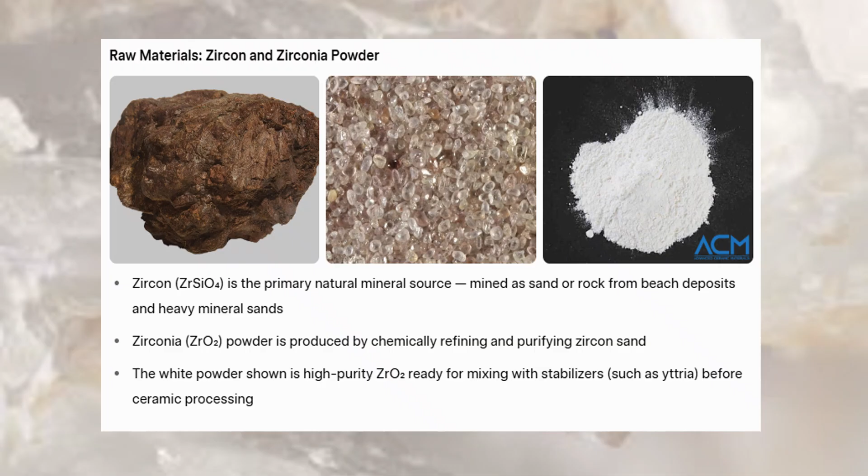Then on the right side is the pure white zirconia powder. This powder is created by chemically refining and purifying the zircon sand. The result is high purity ZrO2 powder that we can then mix with a stabilizer like yttria. This white powder is the starting material for all the advanced zirconia ceramics we'll talk about today. Everything begins with mining zircon and turning it into this fine powder through chemical processing.

Pure ZrO2 has three crystal forms: monoclinic, which is stable at room temperature; tetragonal, which is stable above approximately 1170 degrees Celsius; and cubic, which is stable above approximately 2370 degrees Celsius. Pure zirconia wants to change phases when it cools, and that volume jump would shatter it. Adding yttria stabilizes the useful high temperature forms so we can use it at room temperature.

Cooling causes a tetragonal to monoclinic change with 3 to 5% volume expansion, which cracks the ceramic. The solution is adding 3 to 8% yttria to create yttria stabilized zirconia, YSZ, that stays tetragonal or cubic at room temperature.

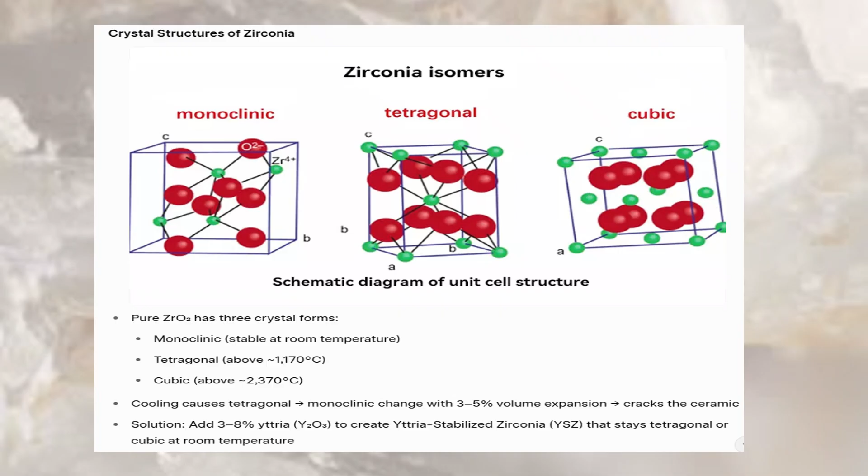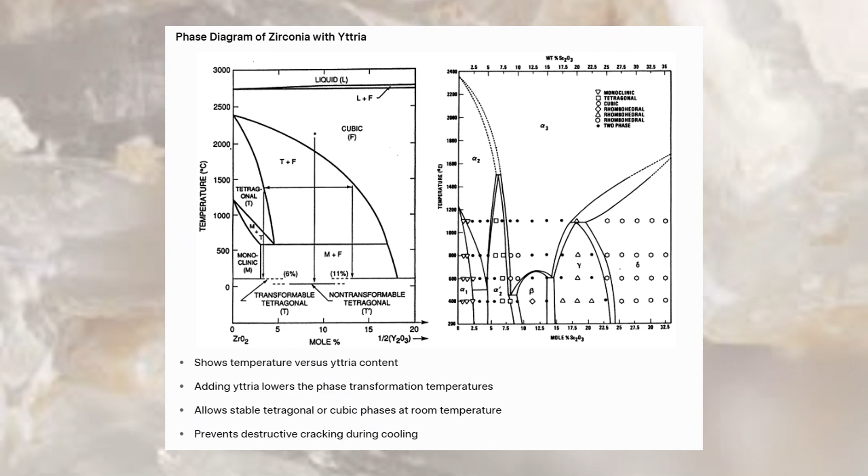This phase diagram shows how adding yttria shifts the boundaries so the tough tetragonal phase remains stable down to room temperature. Without it, the material would destroy itself on cooling. So adding yttria, again, lowers the phase transformation temperatures. It allows stable tetragonal or cubic phases at room temperature.

This is the transformation toughening mechanism. Y-TZP contains metastable tetragonal grains. A stress at a crack tip triggers tetragonal to monoclinic transformation. Volume expansion compresses and closes the crack. It absorbs the energy and stops crack growth, and this results in high fracture toughness.

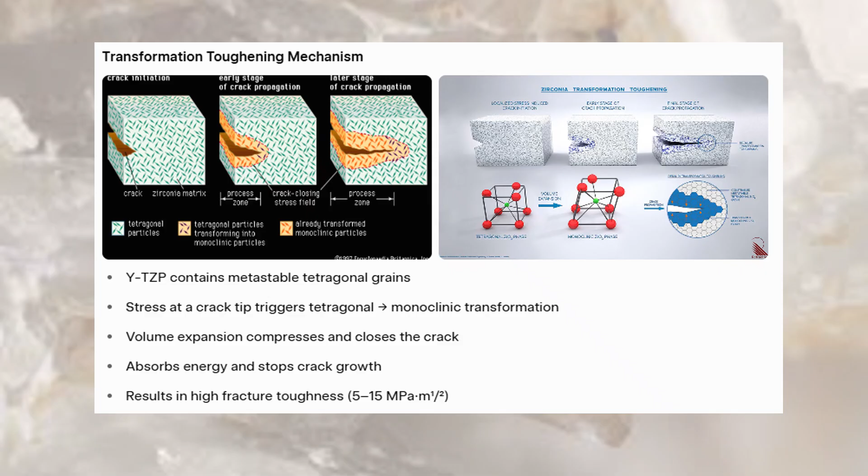So when a crack starts, the stress flips the crystal structure right at the tip. The material expands and literally squeezes the crack shut. This self-toughening is why zirconia is so strong and reliable.

Thanks to transformation toughening, zirconia combines high strength and toughness with heat resistance and biocompatibility, properties that make it superior for demanding applications. The outstanding properties of yttria stabilized zirconia are high fracture toughness, flexural strength, excellent wear resistance, low thermal conductivity, high melting point, and being biocompatible and chemically inert.

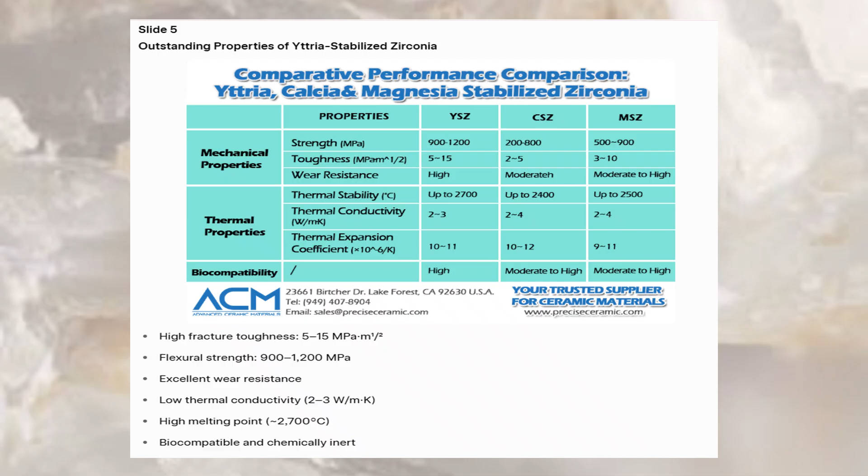Let's look at processing of zirconia ceramics. Mining and refining zircon into pure ZrO2 powder. Batching, forming, drying and debinding, sintering at 1400 to 1600 degrees for densification, and final machining and polishing if needed. So after purifying the powder, we add the stabilizer and mill it.

For thin parts like fuel cell layers, we use tape casting, spreading a slurry and controlling thickness with a doctor blade. The critical step is high temperature sintering, which bonds the particles and locks in the crystal structure.

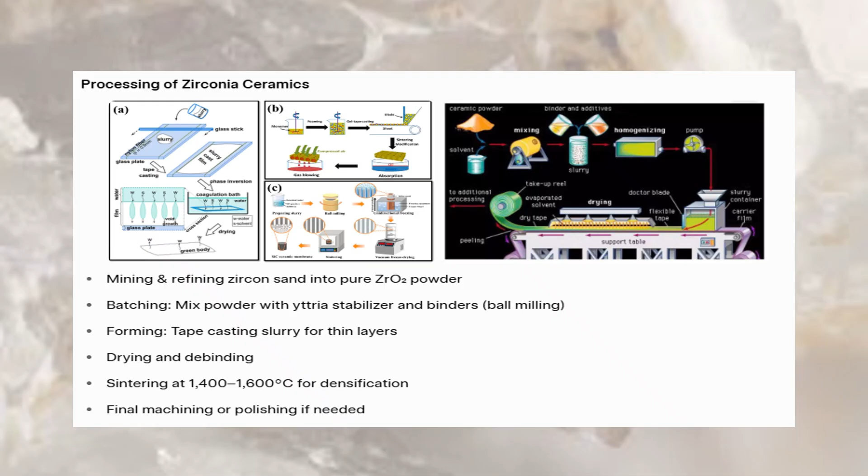Here's what zirconia looks like after all the manufacturing steps are complete. As you can see, some finished zirconia ceramic components. They are dense, smooth, and bright white. They can be made into many different shapes: tubes, plates, rings, blocks, dental crowns, and even complex components for machines.

These finished parts are extremely hard, very tough thanks to transformation toughening, and highly resistant to wear and heat. Because they are also biocompatible, you'll often see them used in dental implants and hip replacements. The transformation from that rough brown zircon mineral and white powder we saw earlier into these precise, strong ceramic components happens through careful powder processing, forming like tape casting and high temperature sintering, the key steps we covered earlier in the presentation.

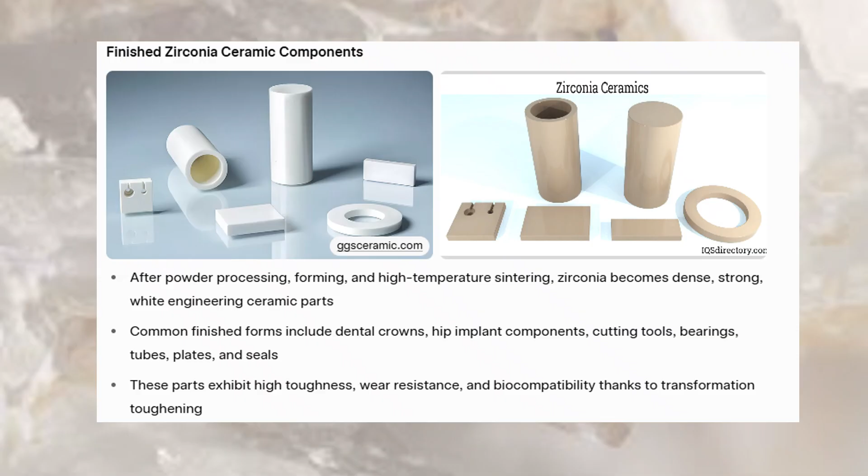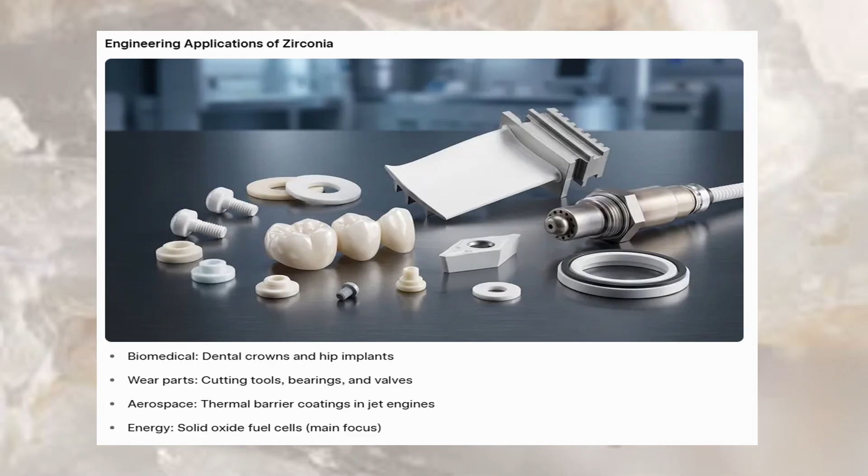In a solid oxide fuel cell, the YSZ layer is the heart of the device. It lets oxygen ions pass through while blocking electrons, generating electricity cleanly. The thin layer is made by tape casting a stabilized zirconia slurry and then sintering it to full density. Stacking many cells creates a practical power unit.

Again, this thin, dense YSZ layer serves as the solid electrolyte. It allows oxygen ions to flow through at high temperatures. It blocks electrons, forcing them to travel through an external circuit and generate electricity. It then converts hydrogen and oxygen into electricity and water, which is clean, efficient energy.

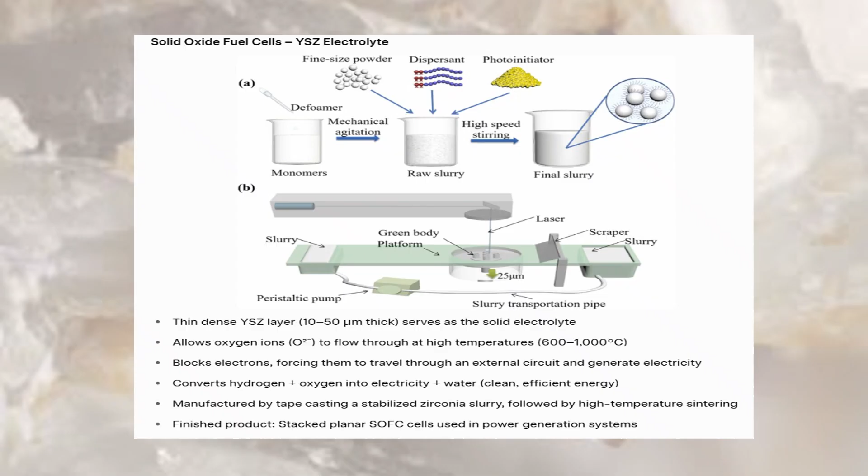This is manufactured by tape casting a stabilized zirconia slurry followed by high temperature sintering. The finished product is stacked planar SOFC cells used in power generation systems.

In summary, zirconia's crystal magic and smart processing make it one of the toughest and most versatile advanced ceramics available today. Its use in solid oxide fuel cells, SOFC, highlights its role in sustainable energy.

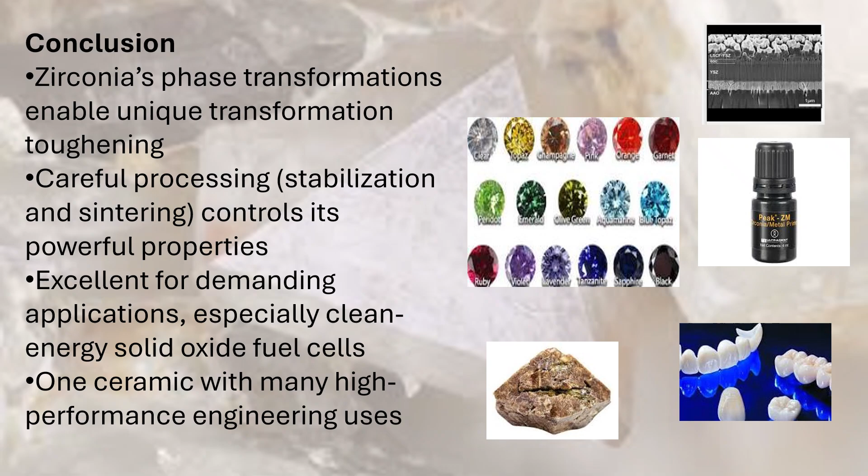Zirconia's phase transformations enable unique transformation toughening. Careful processing, stabilization, and sintering control its powerful properties. It's excellent for demanding applications, again, especially clean energy solid oxide fuel cells. This is one ceramic with many high-performance engineering uses.